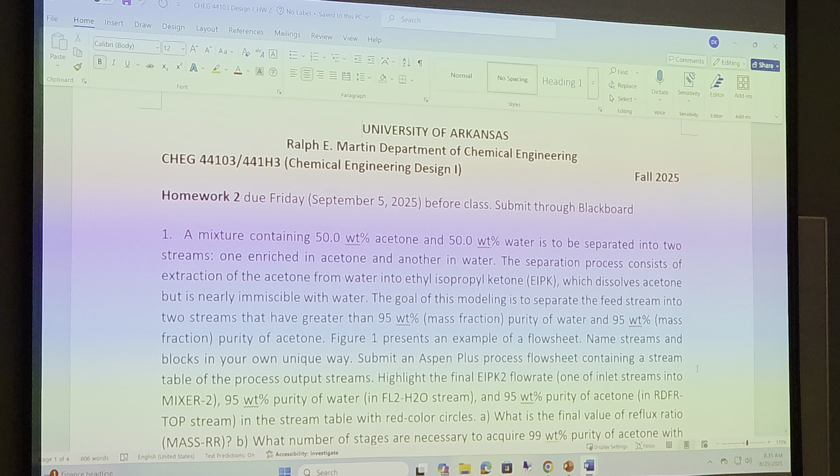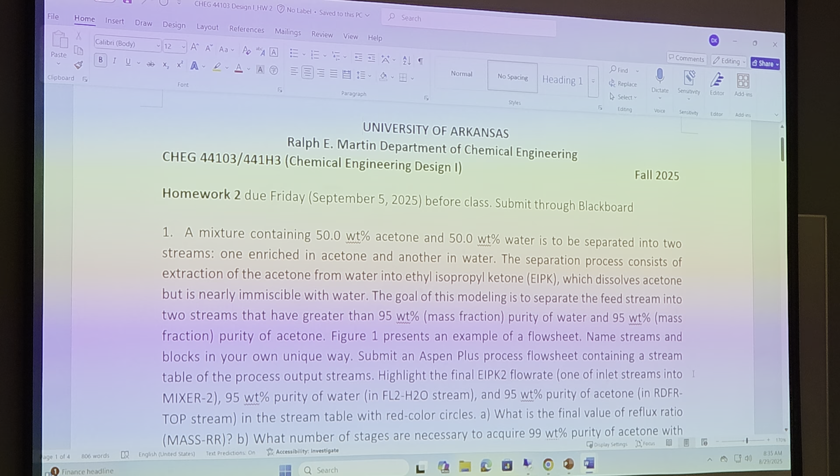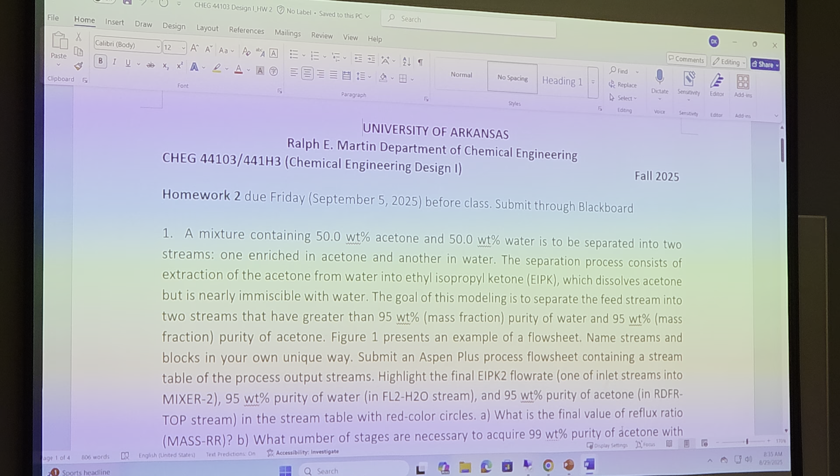Homework 2. I have to see your submission, homework 1 wonderfully. Everybody except for one student submitted on time. I think it's one person maybe dropped out. Yes, but anyway, we don't stop here.

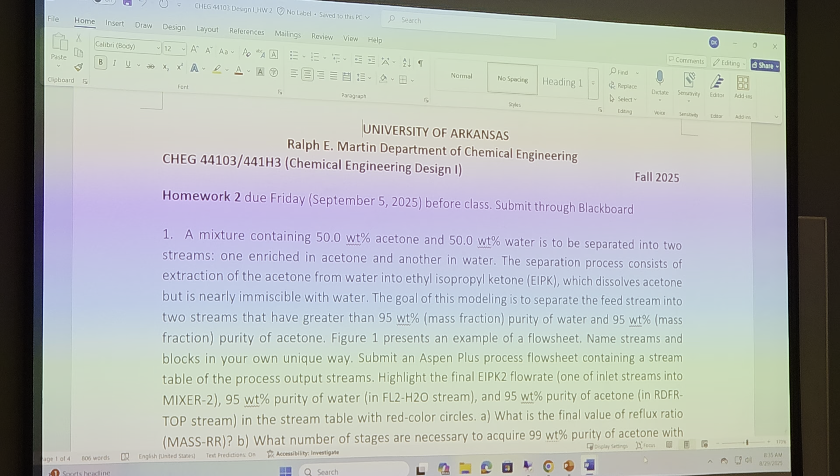As you can see, homework number 2 is available. Due is next Friday. Next Monday we're going to have class, but the due is next Friday.

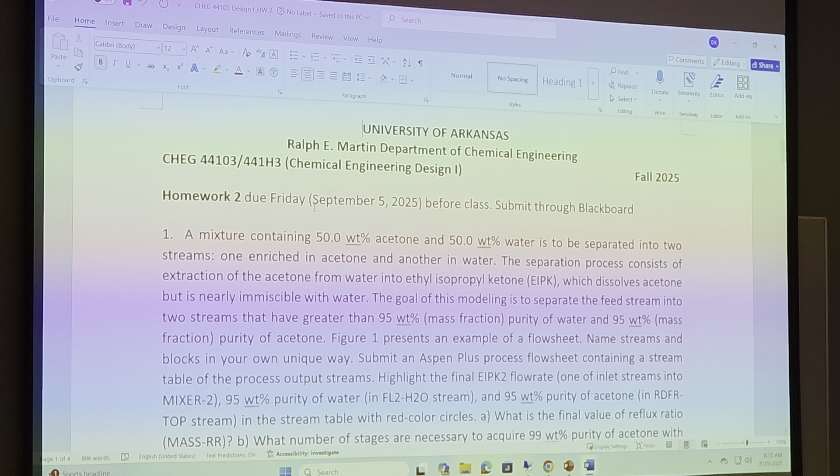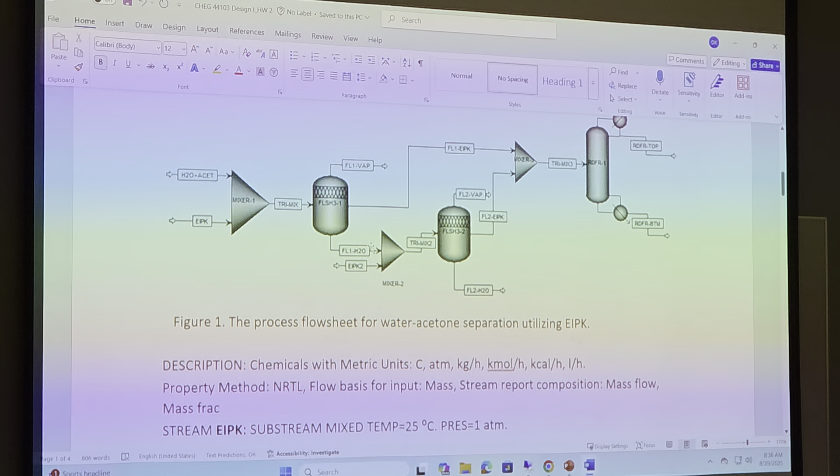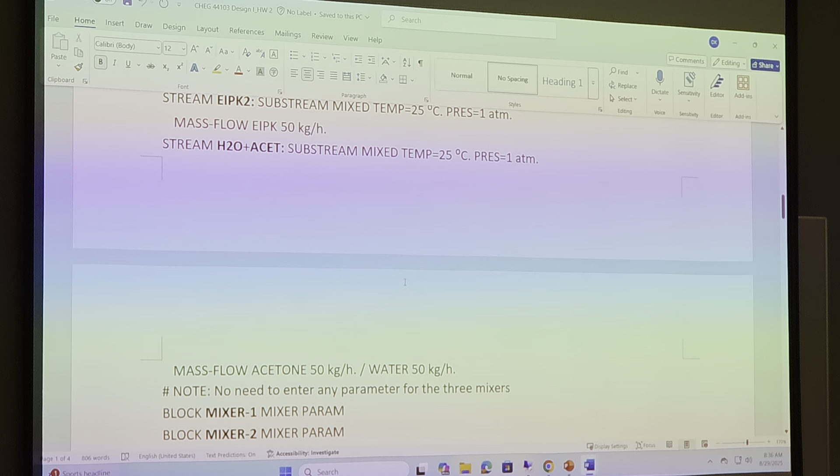If you see the first question, we have done this last Wednesday, I showed you. That's what the first question is. Those numbers are different, so please use this documentation for your homework. Those input numbers are a little different than what we have done in the Wednesday class. So please use this homework documentation for your homework.

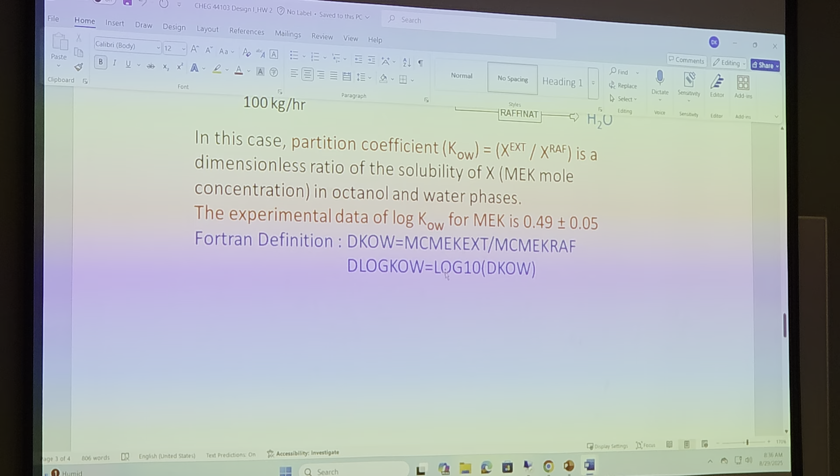Question number 2, question number 3, I will show you today. I will show you today. What that means: try to finish today and then go watch football tomorrow.

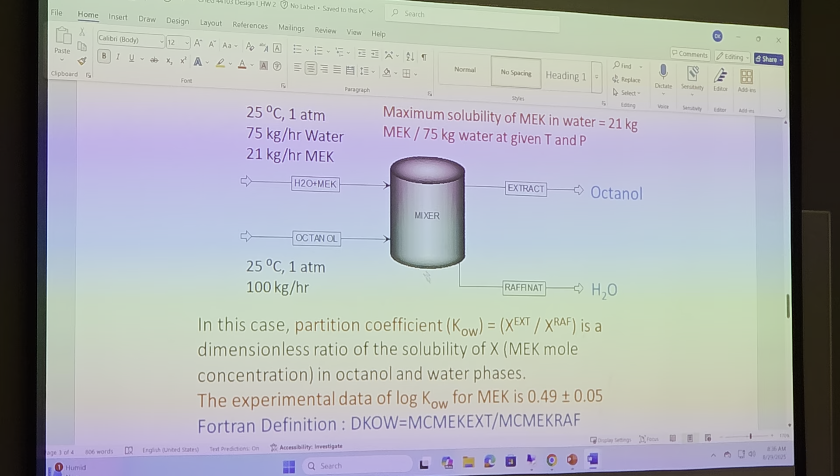That's what we do. So please don't postpone doing it. Why? If you don't try today, you will forget what to do. So I don't make recordings, I'm sorry, but if recordings are available, I know it's too easy for you guys, it's solution there, you don't try hard.

For learning software, as I mentioned to several of you, you need to agonize all night long, spend all night long to figure it out. Then this software becomes truly yours. If you do not go through that process and just copy from recordings or from solutions, this software does not become truly yours. So please understand, try to spend more time, put more effort into finishing your practice and homework questions.

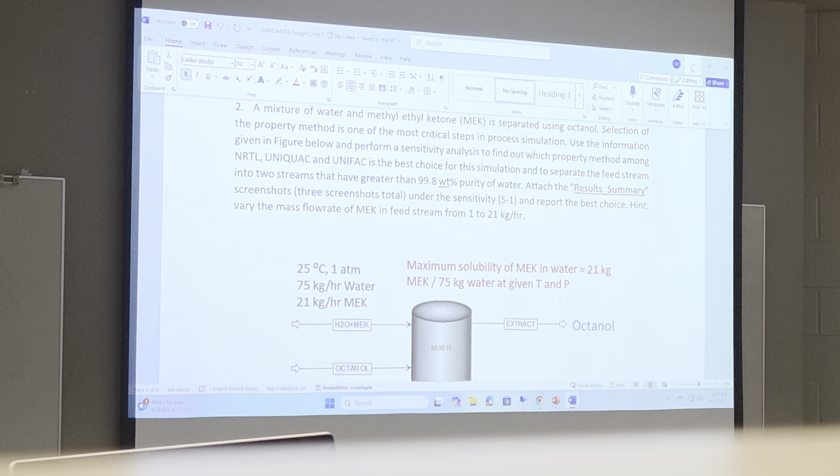Okay? Try to do it today, please. If you don't, you will forget. We should work on our slide today after lunch.

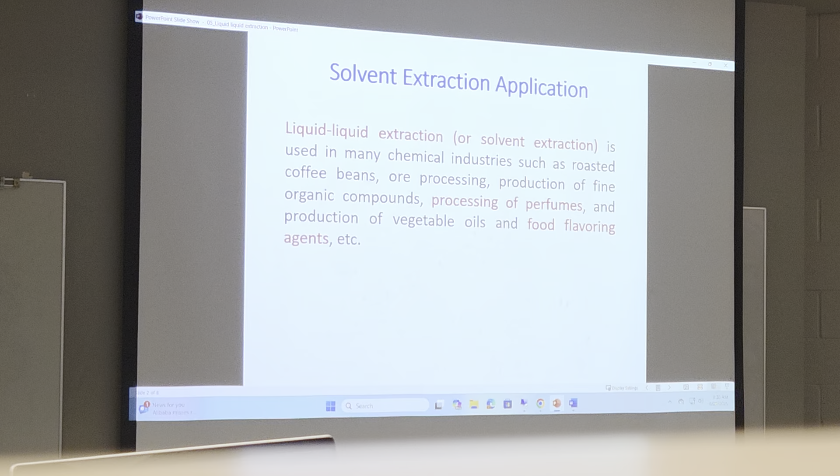Okay, what we do, we look at liquid extraction, in other words, solvent extraction. Liquid extraction is used in many chemical industries, such as coffee manufacturing, production of fine organic compounds, processing of perfumes, production of vegetable oils, production of food flavor agents. As you can see, liquid extraction or solvent extraction is used in many chemical industries.

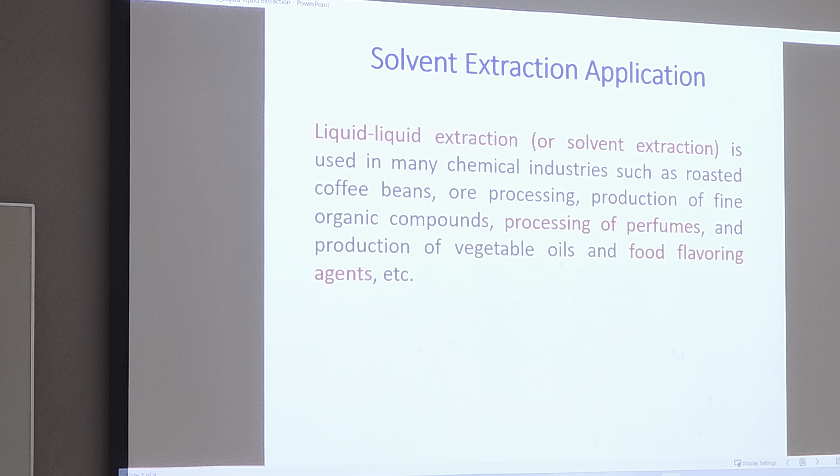Our process description: we have a mixture of water and MEK, methyl ethyl ketone. So we have a mixture of water and MEK. We are going to use octanol as a solvent to enhance the separation of water and MEK.

Our main goal of this modeling is to first carry out a sensitivity analysis by varying the mass flow rate of MEK, methyl ethyl ketone, in the feed stream from 1 to 21 kg per hour, to find out what is the best property method for this system. So the first objective here is to carry out a sensitivity analysis to find out the best property method for this system. That's the first goal of today's modeling.

And to separate the feed stream, meaning the water-MEK mixture, into two pure streams. For example, 99.8% pure water, and then additionally we will use a distillation column to get 99.9% purity of octanol.

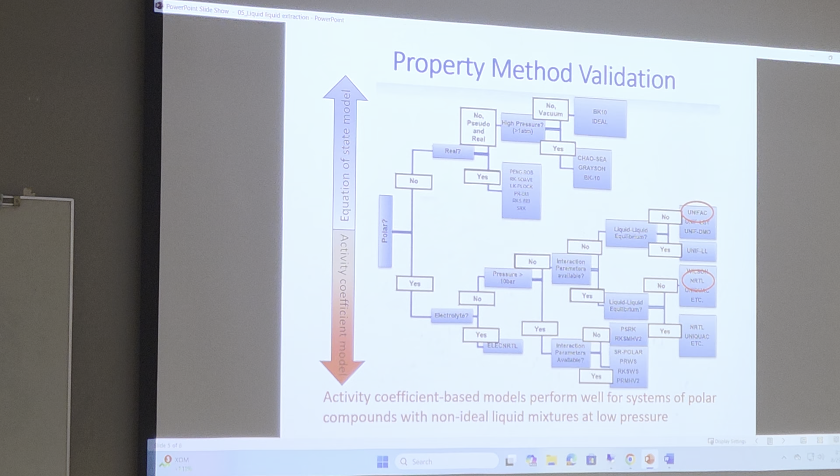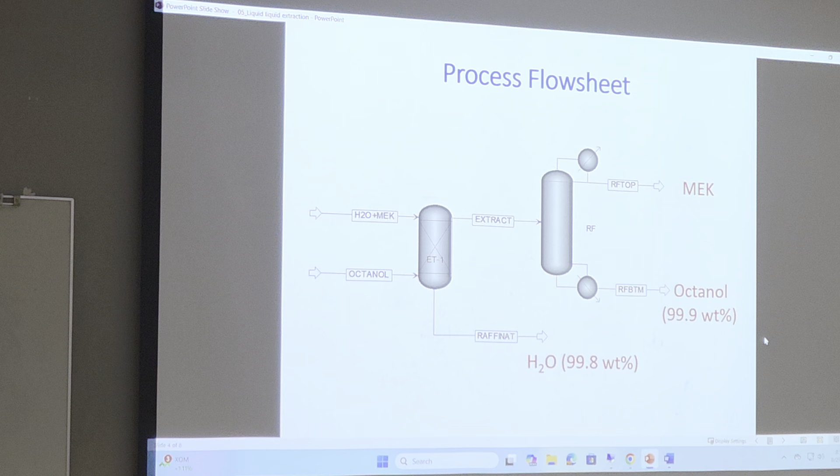We can carry out a sensitivity analysis. What information is given? By varying the mass flow rate of MEK in the feed stream from 1 to 21 kilogram per hour - that information is given. We are going to use that information to carry out sensitivity analysis.

Can you explain us what parameter we are using to find out the best property method? Since we know what the experimental value of the partition coefficient actually is, if we use a specific property method, and get a predicted or estimated partition coefficient, we can compare that to the experimental value. Wonderful, exactly - that's the logic.

Logic is: log of partition coefficient is 0.49. We can set up sensitivity analysis to find out exactly the same log of partition coefficient, get that value from simulation using Aspen, and compare it to that experimental value, and then we can find out the best property method. As I said, we look at 3 different property methods.

Now, if you look at here, we are looking at partition coefficient. Look at the definition. What's the definition of partition coefficient? Mole concentration of MEK in extract phase divided by mole concentration of MEK in raffinate phase. That's the partition coefficient. We just take log, then that value should be close to 0.49.

So we are doing some kind of math in Aspen. What we use for this simple math - we use Fortran, which is available in Aspen, to do very simple math. So I give you the equation here.

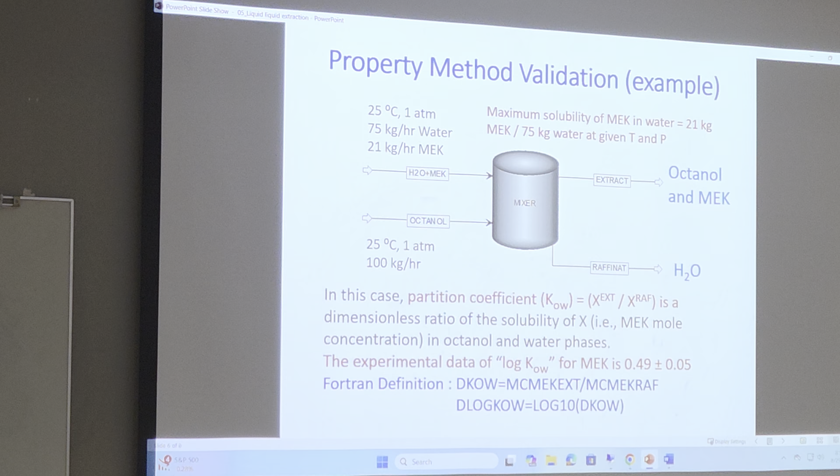So those are basic statement format - we'll look at it. But anyway, the first step, now we need to carry out a sensitivity analysis to find out the best property method. So let's try to look at it. Is it clear? Great, let's try to get

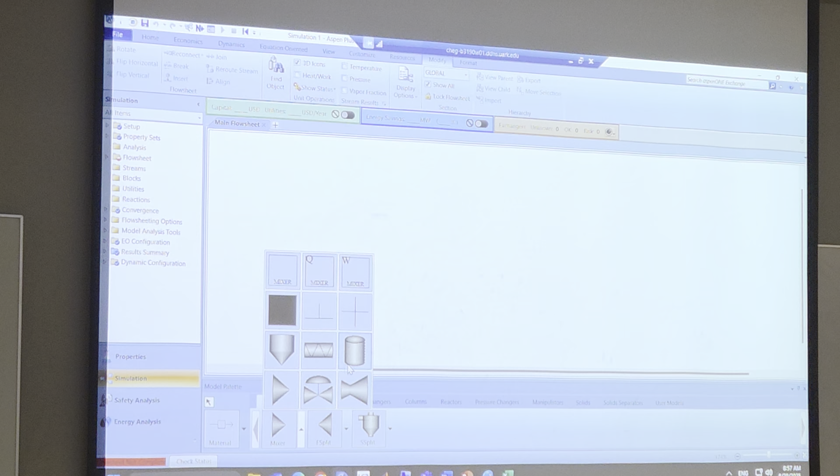First, I will use a very simple mixer. If you go here, mixer, we have different shapes of mixer. I can use that mixer. And as you know, we have 2 input streams and 2 output streams.

So this one is the H2O plus MEK mixture. We use octanol. We name this one as extract, and this one as raffinate. And then I can pour it into this mixer.

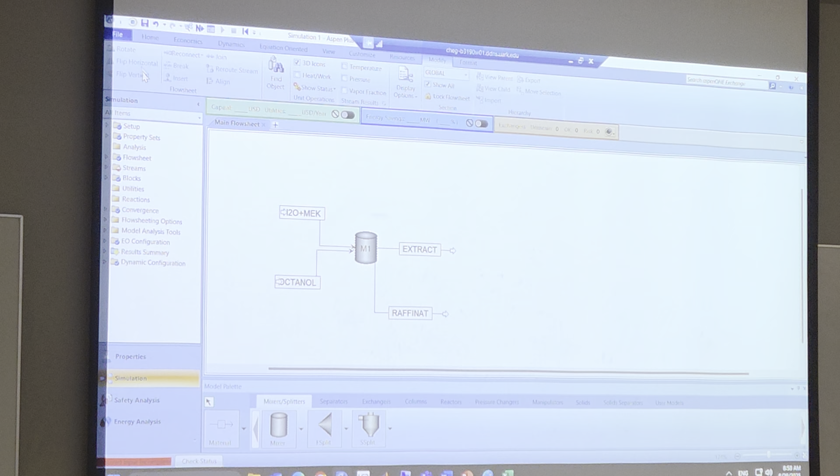Let's continue quickly. We are working on the H2O MEK mixture. All information is given: 25 degrees Celsius. Let me help with this one - H2O 75, MEK 21. But those are all given, so I can go fast.

Octanol at 25 degrees Celsius, 1 atm, and 100 kg/hr. Now if you click, we can do the simulation, but what we are interested in is mole fraction. So go to the setup folder, go to report options, stream tab, and click mole fraction basis.

Now if you just run the simulation here, you will see some warnings. Whenever you see warnings, do your best to fix them. Some warnings maybe you can ignore - it may not affect your simulation - but if you see warnings, try to fix them.

So what this warning means - we have free water, we have dirty water in this case. What does free water mean? Free water is pure water. Dirty water is when water is in hydrocarbon, or hydrocarbons are in water - then it's called dirty water. We are dealing with water with hydrocarbons, MEK, and organics, so we have dirty water.

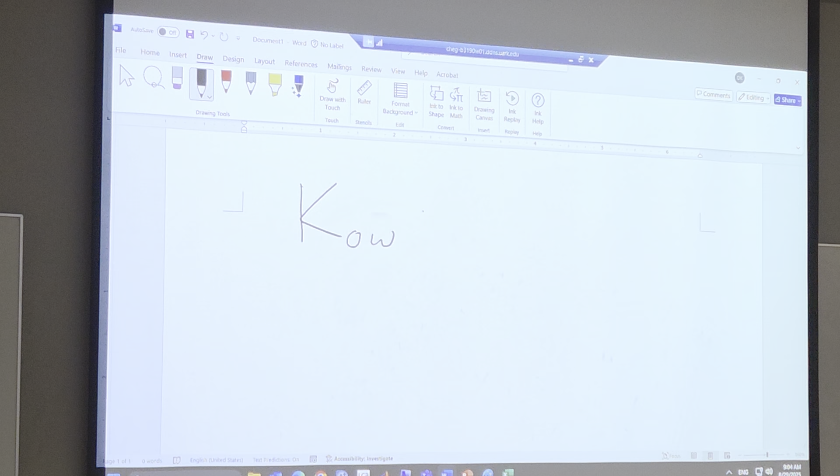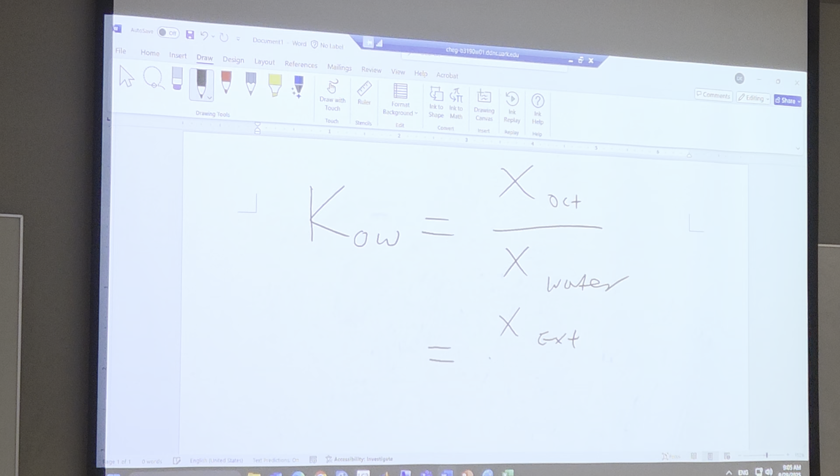How do we define it? It's the ratio of solubility of octanol divided by solubility of water. What solubility? MEK solubility. So what does that mean? We are looking for MEK solubility in extract phase, MEK solubility in raffinate phase. That's the definition of partition coefficient.

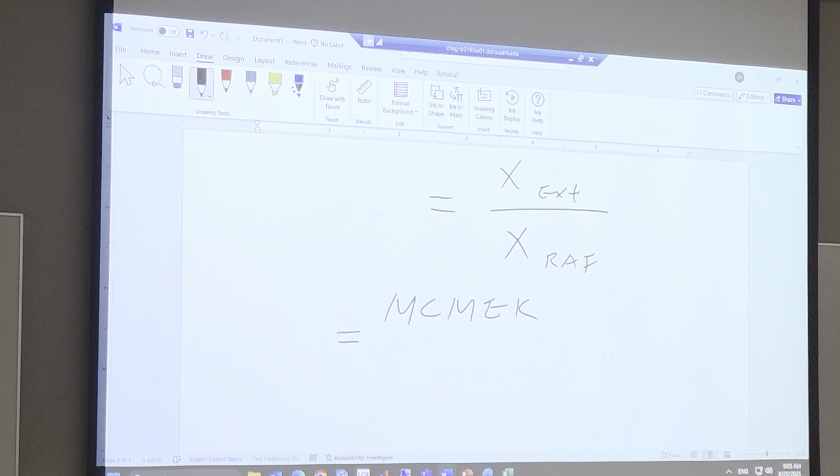In other words, what is solubility? We can say solubility is the same as mole concentration of MEK, methyl ethyl ketone, in extract phase divided by mole concentration of MEK in raffinate phase. That's the definition of partition coefficient. In the experimental world, they found out the log partition coefficient, which is equal to 0.49.

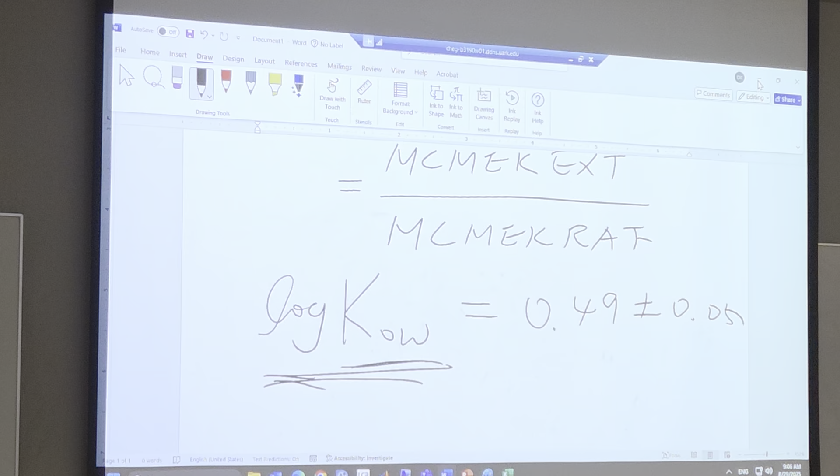Simply, we are looking for this one. First, find out the partition coefficient, take a base-10 log, and compare to the experimental result. So on the definition tab, we need to define the partition coefficient - mole concentration. Now here, a little troublesome - mole concentration...

of MEK. We need to specify that property or variable first. Mole concentration of MEK - how do we do it? If you go to property set, write it down, please just take a note. If you go to property set, there is something called mole concentration. You go here, mole concentration, okay?

But this is just mole concentration. We need to specify MEK. We are looking at mole concentration of MEK. So let's look at it, mole concentration in mole per liter. And if you skip this one, you cannot get an answer, but there's no red color, that's why it's a little confusing. Please take care here - for qualifiers, you choose MEK. So we are looking at mole concentration of MEK.

Now we are looking at partition coefficient, so we have to define two variables. Mole concentration of MEK in extract phase, okay? Let's look at it - that's a stream variable, mole concentration of MEK in extract phase.

So if you look here, mole concentration you cannot find, but the mole concentration we just specified on the property set. So you go to stream property, stream-dash-property - just take note of this. And the stream is, we are looking at mole concentration of MEK in extract phase.

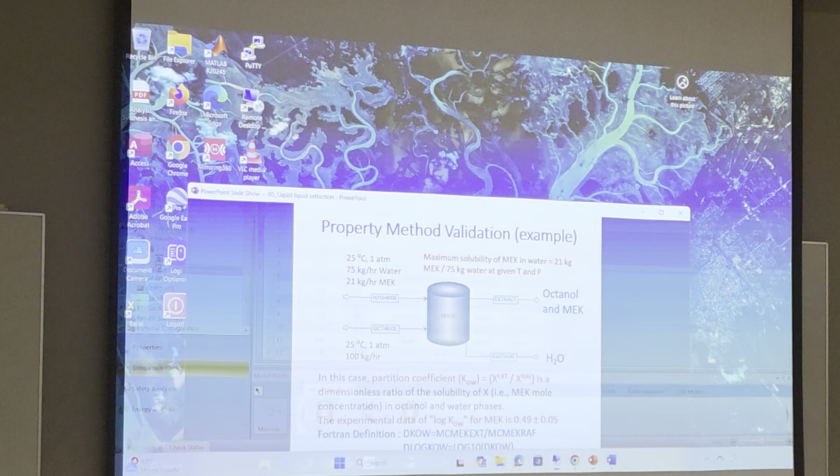Don't worry, let me show you. So if you look here, the experimental data of log KOW is 0.49. That value is from literature review, simply - literature review means some engineers did the experimental work to find out that log KOW. We are using Aspen to simulate the same thing. That's what we found out here. So these values should be close to 0.49.

What property method did you use for this simulation, Lilia? NRTL - we used the NRTL. Our first objective is to carry out this sensitivity analysis to find out the best property method. We used the NRTL, which produced this log KOW approximately 0.77, 0.78. We are looking for it to be close to 0.49.

Okay, let's look at different properties. So I'll go to the properties window. The default is NRTL. Now we can choose maybe UNIFAC - let's choose UNIFAC. Okay, I chose a different property method. I reset. So now I chose UNIFAC property method.

Now we can look at it - what is the log KOW value? Make sure, so I can look at our sensitivity analysis. What value do you observe? Like 0.6, 0.56, something like that. So UNIFAC property method produces better results than NRTL property method. So far you can see this is about 0.6, 0.63.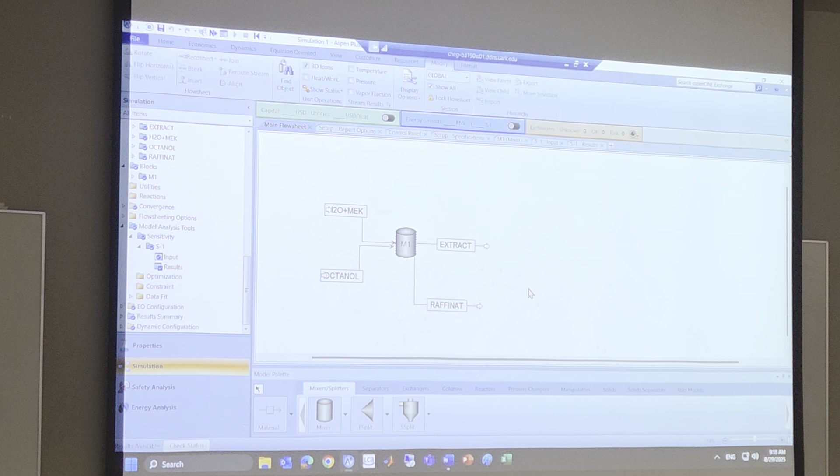So our target is to set up extract. Let's try to use extract. Where is extract? If you go to Column, there's Extract in there - that's what we are using today. So simply I put Extract, I'll name it ET-1, and I can connect it.

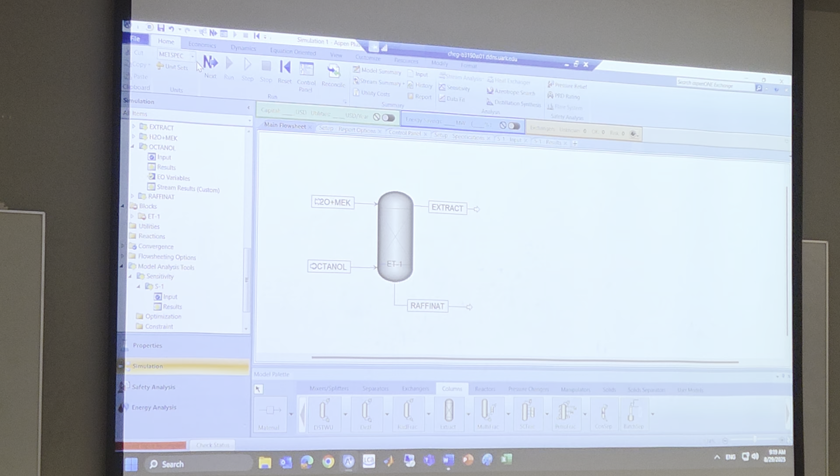In this simulation, our target is to get pure water from this raffinate phase. That's our target. If you come here, so far so good. I can go next. This is the input specification for the Extract block, a new block.

The requirement is very simple: number of stages, that's the only requirement. But we don't know what and where, so maybe you can assume or guess any number - 4 or 5. Let's look at it.

4 number of stages. Key components: first liquid phase is water, second liquid phase is octanol. And pressure, we have 4 stages, but we can define only stage number 1: 1 atm, temperature also 25 degrees Celsius. I just specify stage number 1, and do not be afraid of it.

No information is given, you start from guessing - just guess any number. What we are looking at: raffinate phase, and we are looking at water mass fraction. This one should be 0.998. So I selected number of stages 4, and got 0.9979. I think it's close enough.

Oh, you don't like it, then just come back here. Let's choose 5, see what happens. This only takes 10 seconds - don't be afraid of changing anything. Raffinate phase, I am looking at water mass fraction, greater than 0.998.

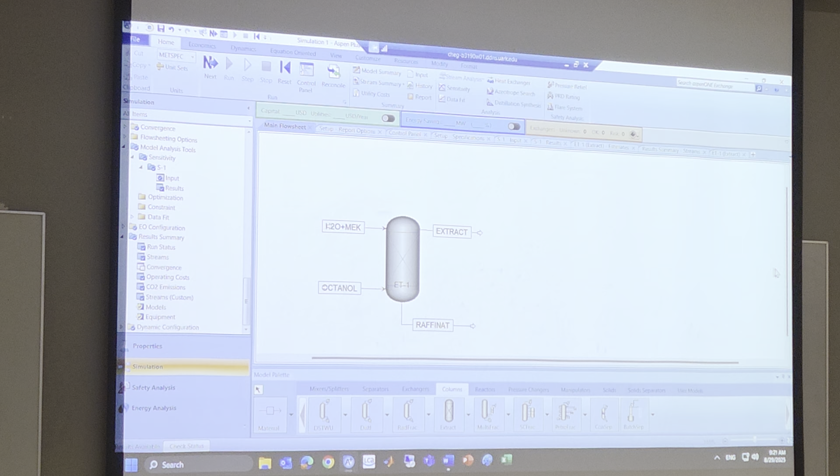Our next step is to separate. This extract phase has octanol and MEK, so we want to separate them. But not much information is given. In that case, the simplest way: if you go to the manipulator, there is one duplicate. I install one duplicate, and since we don't have much information for the distillation column, you always start from a shortcut distillation column called DSTWU.

So I want to look at this DSTWU column first to find out some variables. What this duplicate does is just duplicate this stream - that's what the duplicate does, so I don't need to create this input stream again and again. Just duplicate, and I can connect our input stream.

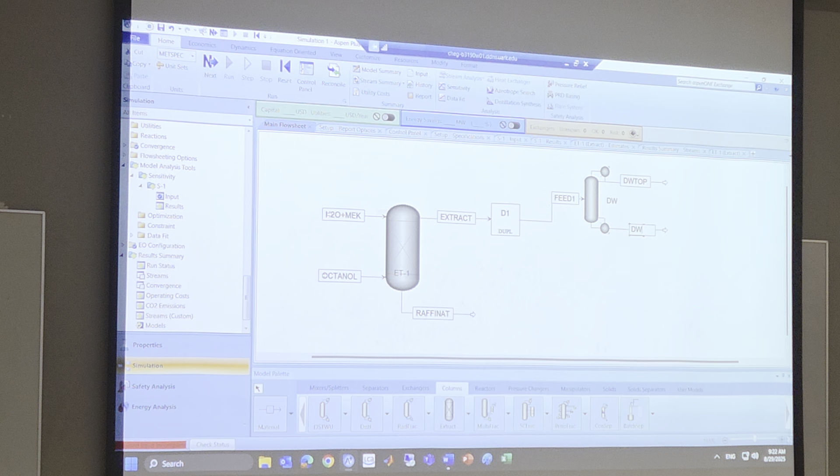There's 2 output streams. I will name this one FEED1. This is called the DSTWU column - shortcut simple distillation column - DW top, DW bottom. Let's go next.

Guidance for distillation: DSTWU column specification. Number of stages or reflux ratio, either one, you can specify any number first. Component light key: light is MEK, recovery maybe 0.995, heavy is octanol, maybe 0.005. You just play around with it. Condenser 1, reboiler 1 or 1.1, doesn't matter - start with any number, do not be afraid of it.

What we are looking for in this case is the bottom stream, which is the octanol stream, and we are looking for octanol mass fraction to be greater than 99.9%. Okay, but we get very close.

We used these two for what purpose? If you go to these two blocks, you can click Results. Using this shortcut column, you get some idea about the minimum reflux ratio, actual reflux ratio, minimum number of stages, actual number of stages. You get some of those basic ideas. We can use that reflux ratio range and number of stages range to do our rigorous column design - that's the beauty of using that shortcut distillation column.

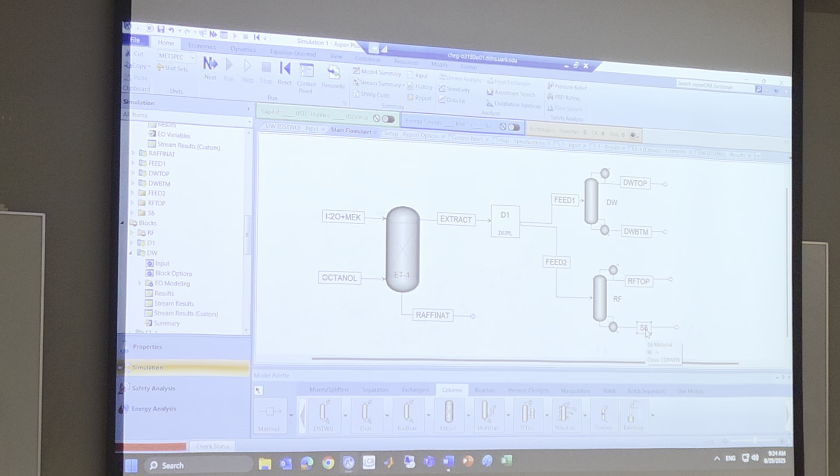We are working on rigorous distillation column design. From these two columns, what information did we get? Maybe number of stages, and a total condenser. Not much information is given. Initially we used a reflux ratio of 2, and then we are looking for the bottom product, so maybe I can choose bottom rate or bottoms-to-feed ratio. We don't know - just start from any number.

We can do a design spec. Bottoms, right? So bottom is okay. We can do design spec later to find out what is the optimal condition.

Let's look at it. We are looking at the RF bottom stream, and we are looking at octanol mass fraction. So octanol mass fraction, we got 0.999884. But if you do design spec, you can set octanol purity to 0.999, and then you can find out the bottoms-to-feed ratio - what is exactly required. Any questions? We can continue next Wednesday.